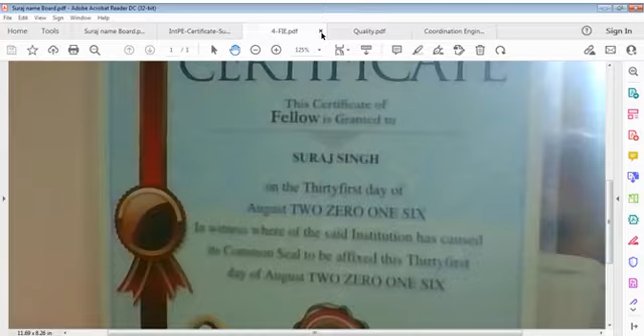And now we have issues regarding the title. I'd like to explain first what the title is. This is quality project works. I'm talking of quality as well as coordination, and quality and coordination work together, because coordination means the procedure to attain quality, and without coordination nothing is going to work.

Nothing works without coordination. Coordination should be in letter and spirit, and the same way quality should be a part of your nature, part of your character, part of your performance, part of your thinking, part of your life, part of everywhere. Without quality we cannot move anywhere. We cannot do without quality. Nothing can move, and that's called work quality, performance quality, defined quality, organized quality.

So it's quality project works, and coordination engineering, which is process or procedures. Whatever work we perform, we should have certain links to each other. We cannot say this activity is independent of others. Yes, there can be independent activities, but they have certain relations with other activities, maybe in parallel or in sequence, in our organization or on schedule or plan, but coordination is a must. Coordination is forgotten by people. There used to be coordination, but now coordination is absent.

Very few people are able to coordinate because coordination means you have to concentrate. Coordination is continuous concentration, not just a one-time thing. Even if you stop somewhere, you have to keep in mind where you stopped, and restart from that point. Whatever system you are in, you have to find that point again and move further. So coordination is a completely continuous process.

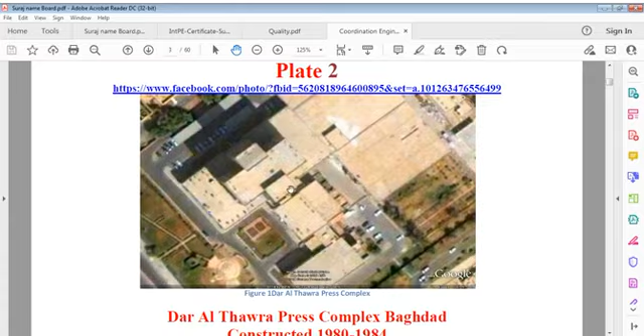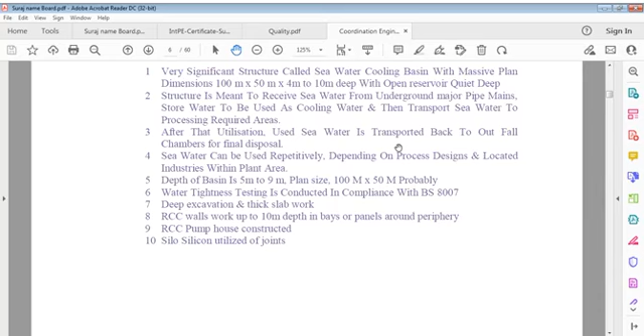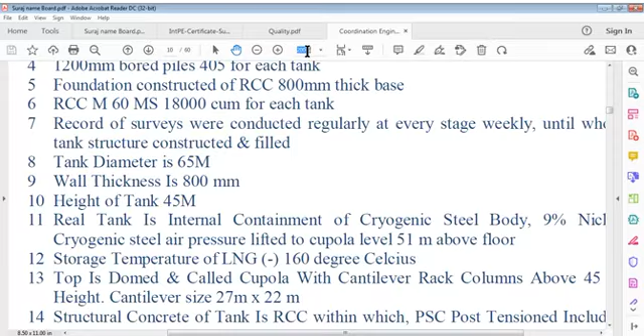So my dear friends, I'm just browsing this file for you, and this plate is referred to LNG plant located at Ras Laffan in Qatar. LNG means liquefied natural gas. Qatar gas project Ras Laffan, Qatar. LNG plant showing 4 number LNG tanks located in Ras Laffan.

Now, these tanks are part of this plant. I'm talking about these 3 tanks and this tank here. These 3 tanks were constructed one time and this one separately. All are same, no difference. Design is same, work is same; it is because of contract. Here, Midmac company, where I worked for 1 year in 1995-96. This company was involved in all civil works of these 4 tanks.

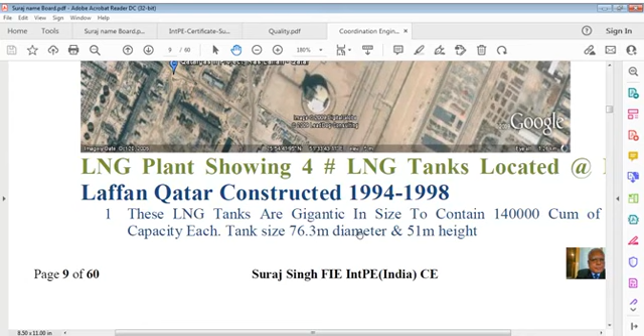These LNG tanks are gigantic in size to contain 140,000 cubic meter capacity each. Tank size is 76.3 meters diameter and 51 meters height. Excavation for each tank is 1200 cubic meters. Soil improvement carried out using graded granular fill, many meters thickness in layers, duly compacted and FDD ensured. 1200mm bored piles, 405 each tank included. Bored piles cast in place or cast in situ.

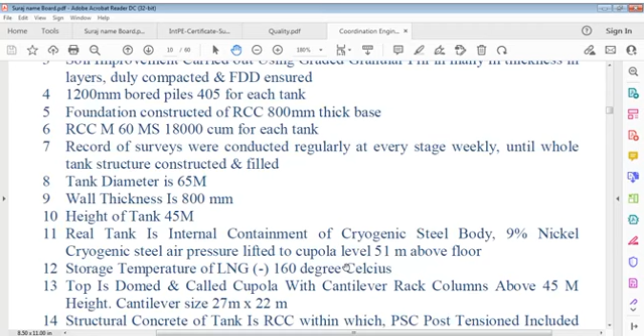Foundation constructed of RCC element, 800 thick base. RCC grade M60 with microsilica included, 18,000 cubic meter for each tank. Record of surveys, we usually call ROS, were conducted regularly at every stage weekly until whole tank structure constructed and filled. Tank diameter is 65 meter. Wall thickness is 800. Height of tank 45 meter or more. Actually it's more than that; I have indicatively written it. It's 50 meter. I correct this one.

Real tank is internal containment of cryogenic steel body, 9% nickel cryogenic steel. Air pressure lifted to cupola level, 51 meter above floor. The storage temperature of LNG is minus 160 degrees Celsius according to information available. It varies. Top is domed, called cupola, with cantilever rack columns.

Above 45 meter height, 50 meter height cantilever size. Cantilever projection on top is 27 meters by 22 meters. It's shown in the sketch, I'll show you that one.

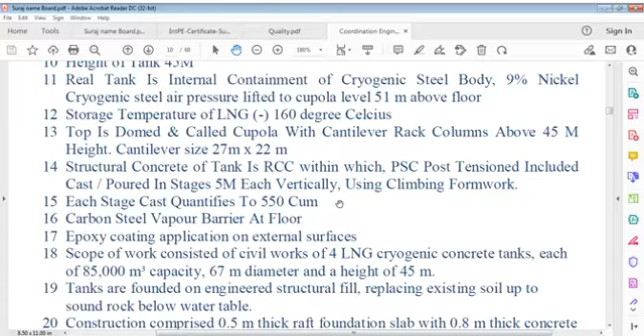A structural concrete tank is RCC, within which PSC post-tensioned concrete is cast in stages of 5 meters each vertically using climbing formwork, quick formwork. Each stage cast quantifies to 550 cubic meters.

Carbon steel vapor barrier at floor, and epoxy coating application on external surfaces.

Scope of work consists of civil works of 4 LNG cryogenic concrete tanks, each of 85,000 cubic capacity, though it is 140,000 - let's say capacity now - with a 67-meter diameter and a height of 45 meters.

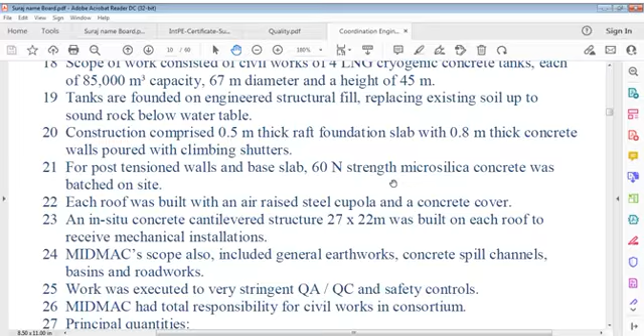Tanks are founded on engineered structural fill, replacing existing soil up to sound rock below the water table. Construction comprised a 0.5 meter thick raft foundation slab with 0.8 meter thick concrete walls poured with climbing shutters.

For post-tensioned walls and base slab, 60 Newton strength microsilica concrete was batched on site. Each roof was built with an air-raised steel cupola and a concrete cover.

An in-situ concrete cantilever structure, 27 by 22 meters, was built on each roof to receive mechanical installations. Midmac's scope also included general earthworks, concrete spill channels, basins, and roadworks.

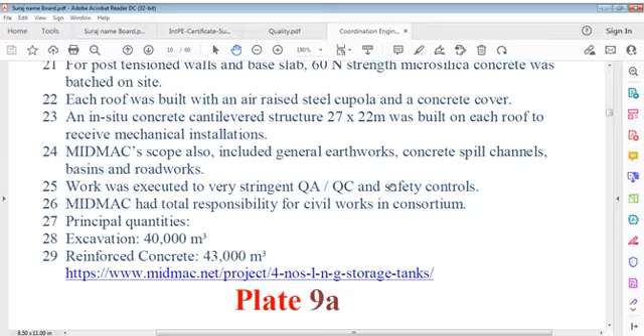Work was executed to very stringent QA, QC, and safety controls. Midmac had total responsibility for civil works in the consortium.

Principal quantities: excavation 40,000 cubic meters for 4 tanks, reinforced concrete 43,000 cubic meters. Here is plate 9 - you can see the tank itself.

You can see the tank here, mechanical handling of it. It's the complete tank - these are the stairs, you can see that. It was the arrangement at that time.

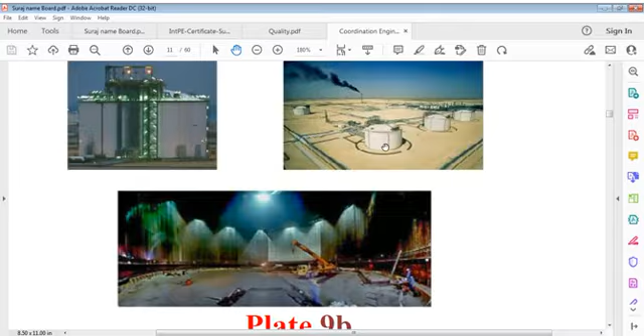You can see this is the finished product, and how it works. Here during construction stage, this one and that one - and this is the finished product. You can see these are tanks 1, 2, 3, 4, and this is the plant.

You may see this internal work being carried out - that's the flooring work.

Cryogenic tank construction - you can see it's inside the tank being done, and the spacious area for this tank.

You may see the concrete surface in various jumps - 1, 2, 3, 4, 5, 6, 7, 8, 9, 10. I guess approximately 5 meters each. So if you see these layers, again 1 through 10, which means about 50 meters here, and then the cupola starts.

And this is the ring beam here, you can see it very well. This is the form for the other one, last time the top slab. And this is, you can say, the other one in the same way - not visible otherwise.

These are all works going on, property works, materials lying here and there. And this is that tank.

We'll come back to this and see what to do about it. I'm now going to state something on the issue of - let me see, what is that - yes, constructability, 3 number tanks. Let's see what is that, and also constructable LNG tanks. Let us first see what it says - constructable 3 number tanks on Midmac. It says something, let's see what's that.

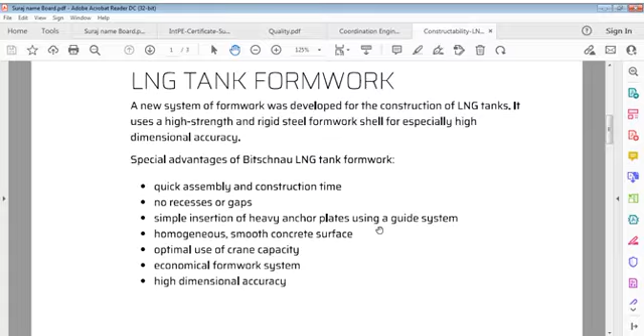Special advantages of Bitschnau LNG tank formwork include quick assembly and construction time, no recesses or gaps, simple insertion of heavy anchor plates using the guide system, homogeneous smooth concrete surface, optimal use of crane capacity, economical formwork system, and high dimensional accuracy.

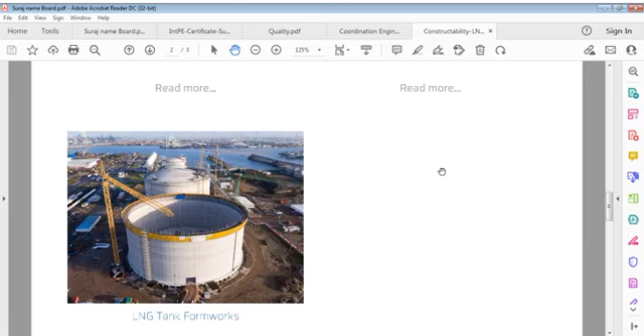I'll open another file, which is also very important in this case. I may be available on the pop-up, if not I don't know. Construction buildability, design build, and general requirement, construction and overall. Let me see this construction buildability, what is that, let us see.

It is a pre-construction exercise that assesses designs from the perspective of those that would manufacture. Actually it says something different. Let me blow this up further so it's clear. Let us understand buildability, and understand all these aspects.

Buildability is a pre-construction exercise that assesses designs from the perspective of those that will manufacture, install components, and carry out construction works. It should not be confused with value engineering, which is used to solve problems and identify and eliminate unwanted costs. though some processes are common to both activities.

In very broad terms, buildability should assess elements of designs in relation to achieving desired final quality, meeting program requirements, de-risking perceived problems, and achieving optimum value for money. This is what the objective is, you could say.

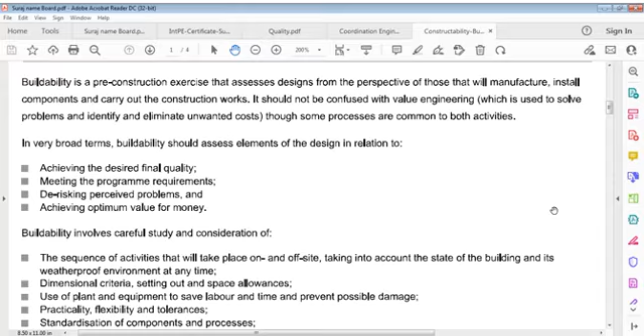Buildability should assess: quality is important, meaning it helps in achieving desired final quality. Well, now I'd say it's not just desired, it's mandated, it should be mandated. So we can say it should achieve desired final quality, meeting program requirements, de-risking perceived problems, and achieving optimum value for money. This is what it is, and what it should be.

So we can say buildability involves careful consideration of four points: one is quality, one is program schedule or program requirement, another is reducing risk on problems, and achieving value for money. So in buildability, advice is given on quality relevance, schedule relevance, risk reduction relevance, and value for money relevance. It depends, you can understand this yourself.

Buildability involves careful study and consideration. Now, careful study of what? The sequence of activities that take place on and off site, taking into account the state of the building and its weatherproof environment, at whatever time.

Dimensional criteria, setting out and space allowances, use of plant and equipment to save labour and time and prevent possible damage, practicality, flexibility, and tolerances, standardization of components and processes, reduction in complexity to shorten the learning curve, and identification of appropriate suppliers.

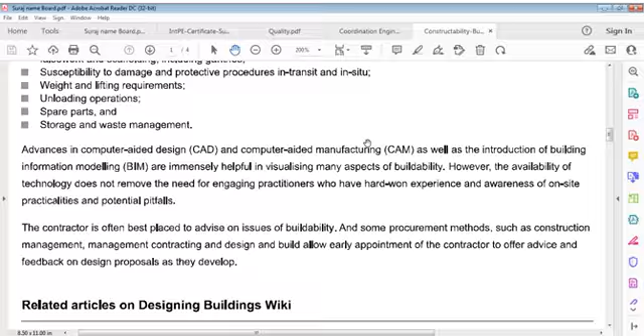Related articles on design may be relevant, though I'm not referring to them, just for information, I'm telling you what's CDM planning period, construction management, customer, all this you can go through. I'll go back now to talk of this point as we discussed, this very important point in the list.

As we talked of, this is a sequence of activities that take place, and that is what we have to understand. Take into account how the dimensional criteria, that's very important. Dimensions should fit in the dimensions on all drawings, so dimensional criteria in all drawings is very important to computerize, but we must be clear that this doesn't impact on works.

Setting out criteria and space allowances we have to consider everywhere, during design as well as during execution, and how to use plant and equipment to save time of workers, speed up the job, accelerate work and prevent possible damages.

So plant and equipment are very important considerations as far as time allowance is concerned. We have to organize time, and time is very important. Time can speed up, or time can be lost if we remain careless. And we have to see the practical viewpoint.

We have to understand flexibility requirements, tolerances, but keep in mind the practical aspect, it should not be bookish all the time. We have to understand this is part of the job, and flexibility which doesn't affect quality or standards, we have to keep all that in consideration.

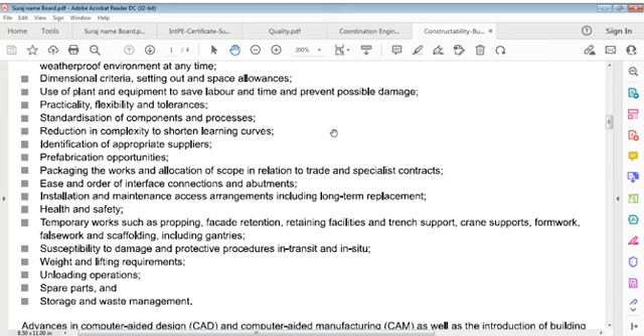Yeah, all these parts are very common, we have to think of these from time and again. And I'll close this file as well.

Science Direct, I think, design for constructability, LNG project management. Let us see what this actually is. This is not my point. Let me go to another file. I'm just trying to search for that. I think I just missed that point. Where is that? I just saw that file. Constructability overview, LNG project.

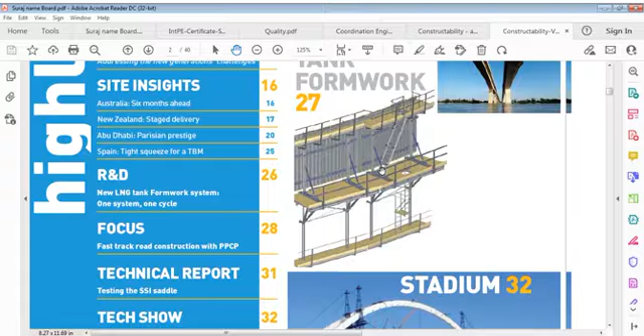You can say tank formwork, this is how you construct this tank, it's a kind of system. You can see supports here, it's a kind of support, and you can see this tank formwork, 27, is a bridge here.

I'm concerned with nuclear, so this is a tank formwork. Let's move further to see. You see there's a curve here, and the stadium here it is. You can see how this works. Stadium just as a part of assessing sustainability. That's the point here: sustainable development.

Initial efforts have been focused on raising awareness of sustainability issues through education, training, and encouraging changes in behavior through green initiatives. Even small individual improvements become major gains. How to measure these efforts? Sustainability covers... Just blow it up, please, faster.

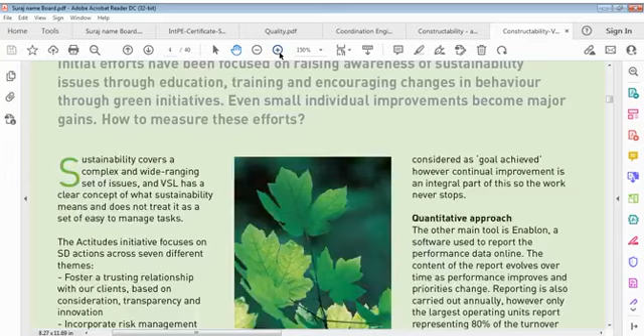VSL has a clear concept of what sustainability means, and do not treat it as a set of easy to manage tasks. The initiative focuses on sustainable development actions across 7 different themes: foster a trusting relationship with our clients based on consideration, transparency, and innovation.

Incorporate risk management into the day-to-day running of the company. Lead our business sector in terms of occupational health and safety. Develop our employees' skills and promote equal opportunity. Establish balanced long-term relationships with our partners, suppliers, subcontractors, and ensure that our business respects the environment in the design of works, and participate in the economic and social life of regions.

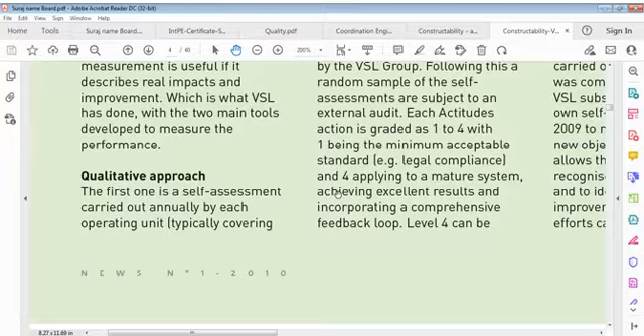However, these are just handled as a qualitative approach. First one is a self-assessment carried out annually by each operating unit, usually by the administration, finance and advocacy department. Each of 42 actions is measured against performance criteria to assess the current situation and set an improvement objective for the coming year. These assessments are then reviewed by regional management.

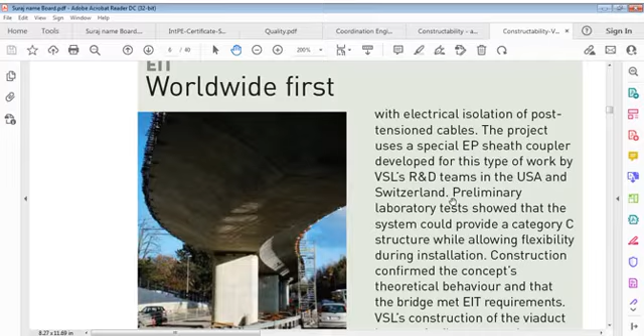Okay, this is a procedure of the company, leave it behind. I'm not interested. I'm just trying to find a quantitative approach. Okay, both are there, quantitative and qualitative. I am trying to find usable information. This is not mine, worldwide first electrical isolation. I think we have to move further. No need of this. Drilling works are going on here, and you may see that

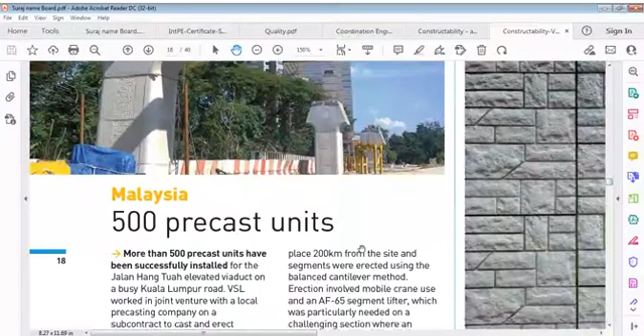this is here, first corrosion resistant addition. VSL was recently awarded its first corrosion protection contract in Hong Kong, and highway approval in Florida. This is their advertisement. I think it's no use for us. I think I'm wasting time, is it? Transport. Well, I think it is only informative work. Something is good here.

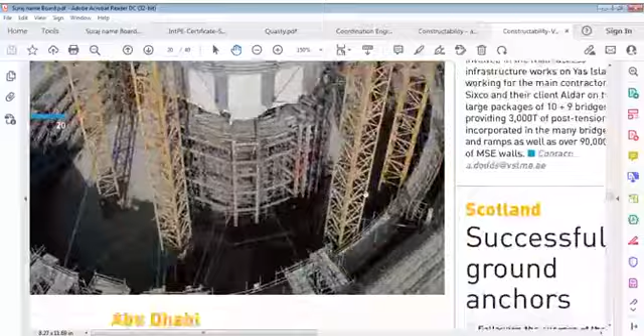Yeah, it is that. I was trying for this. It was important for me. This is one system, one cycle: new LNG tank formwork system. That's what I was looking for. Extensive worldwide involvement in construction of LNG tanks has enabled VSL to analyze data and obtain feedback from site production teams to identify typical and specific problems associated with tank construction, subsequently developing innovative and unique solutions.

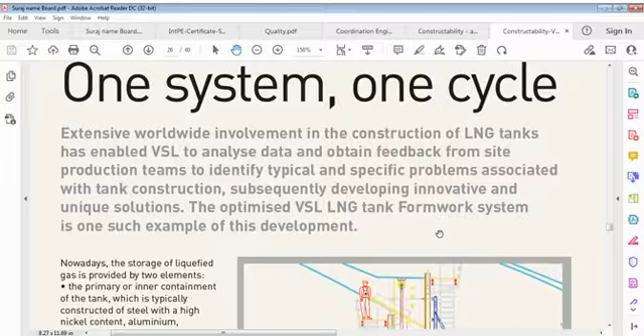The optimized LNG tank formwork system is one such example of this development, and I can now blow this up a little for further clarity. Nowadays, storage of liquefied gas is provided by two elements: the primary or inner containment of the tank, which is typically constructed of steel with a high nickel content, aluminum, stainless steel, or in some cases post-tensioned concrete to meet the extreme demands of cryogenic conditions.

So what is that? The primary or inner containment of the tank is typically constructed of steel with a high nickel content, aluminum, stainless steel, or in some cases post-tensioned concrete to meet extreme demands of cryogenic conditions. The containment must independently be able to withstand the hydrostatic load of liquid. This is the primary one.

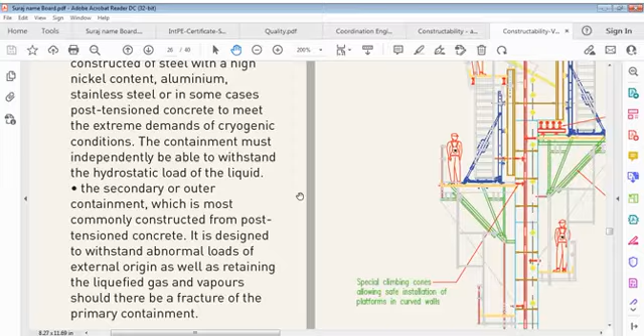Secondary is the outer containment, which is most commonly constructed from post-tensioned concrete, designed to withstand abnormal loads of external origin as well as retaining liquefied gas and vapors should there be a fracture of the primary containment. So this comprehensive modular system for the secondary containment can be used to build entire circular containment structures without the need for time consuming and costly modifications to the climbing form system after installation on site.

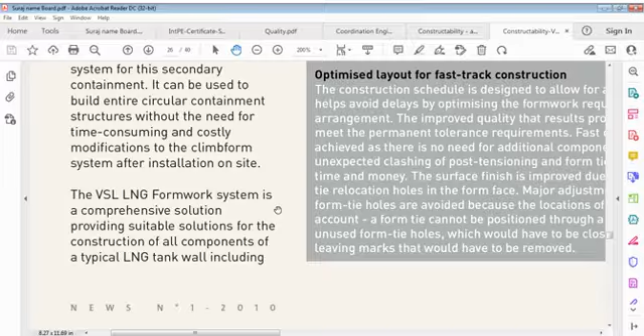The formwork system is a comprehensive solution providing suitable solutions for construction of all components of typical... here. I'll show you what it wants to say first. Optimized layout for fast track construction. Let me see what it's saying. Including tapered walls. Let me finish it first.

What is that after that? Including tapered walls. So it is the next page actually. Including tapered walls with reducing thicknesses, walls of constant thickness and ring beams.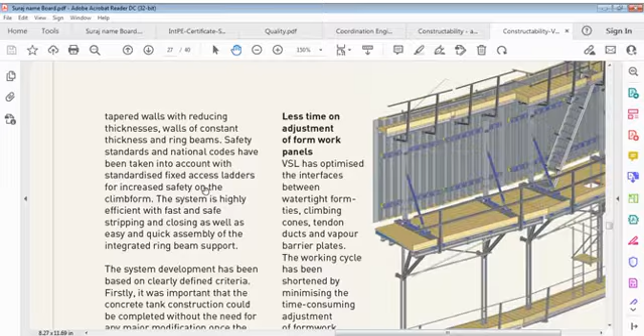Safety standards and national codes have been taken into account, with standardized fixed access ladders for increased safety on the climbing form. The system is highly efficient, with fast and safe stripping and closing, as well as easy and quick assembly of integrated ring beam support. System development has been based on clearly defined criteria.

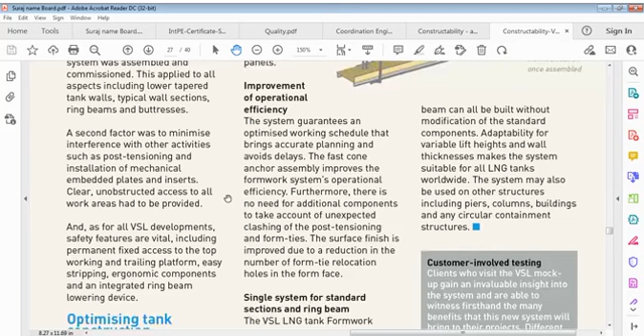Clear unobstructed access to all work areas had to be provided, and for all VSL developments safety features are vital, including permanent fixed access to the top working and trailing platform, easy stripping, ergonomic components, and an integrated ring beam lowering device. Tank construction should be optimized. While designing this new formwork system, VSL has focused on 5 points.

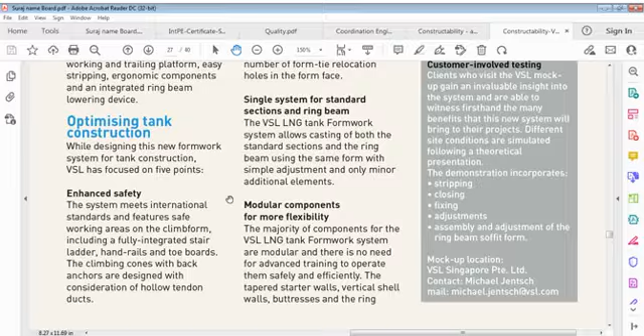Enhanced safety. The system meets international standards and features safe working areas on the climbing form, including a fully integrated stair ladder, handrails and toe boards. Climbing cones with back anchors are designed with consideration of hollow tendon ducts.

What I'm talking about is climbing formwork, that is less time on adjustment of formwork panels, optimizing the interfaces between watertight form ties, climbing cones, tendon ducts and vapor barrier plates. The work cycle has been shortened by minimizing time-consuming adjustment of formwork panels.

So it says less time on adjustments of formwork panels, optimized interfaces between watertight form ties, climbing cones, tendon ducts and vapor barriers. So all that is improvement of operational efficiency. The system guarantees an optimized working schedule that brings accurate planning and avoids delays.

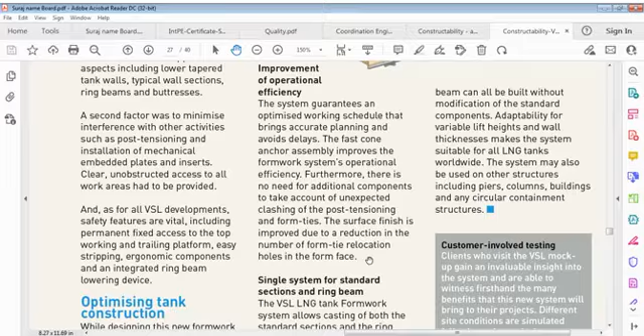Fast cone anchor assembly improves the formwork system's operational efficiency. Furthermore, there is no requirement for additional components to take account of unexpected clashing of post-tensioning and form ties. Surface finishes improve due to the reduction in the number of form tie relocation holes in the form face. Single system for standard section and ring beam.

The LNG tank formwork system allows casting of both standard sections and ring beam using the same form with simple adjustment and only minor additional elements. Modular components for more flexibility. The majority of components for the LNG tank formwork system are modular and there is no requirement for advanced training to operate them safely and efficiently. Tapered starter walls, vertical shell walls, buttresses and ring beam can all be built without modification of standard components.

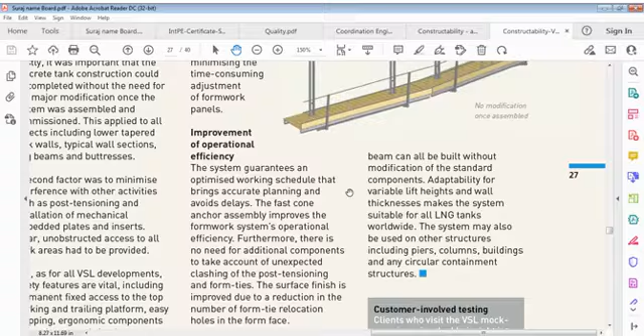Adaptability for variable lift heights and wall thicknesses makes the system suitable for all LNG tanks worldwide. The system may also be used on other structures, including piers, columns, buildings, and any circular containment structures. And then we have customer involved testing.

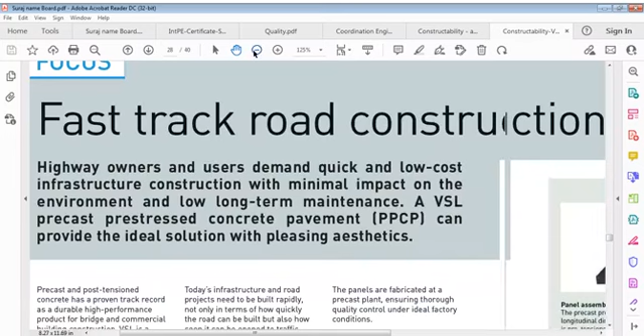Fast track road construction, highway etc. I'm not going to talk of this though. What is this? It says fast track road construction with PPCP, and highway owners and users demand quick and low cost infrastructure construction with minimal impact on the environment and low long-term maintenance. Precast pre-stressed concrete pavement can provide an ideal solution with pleasing aesthetics. So this is a different subject, we'll discuss it later on.

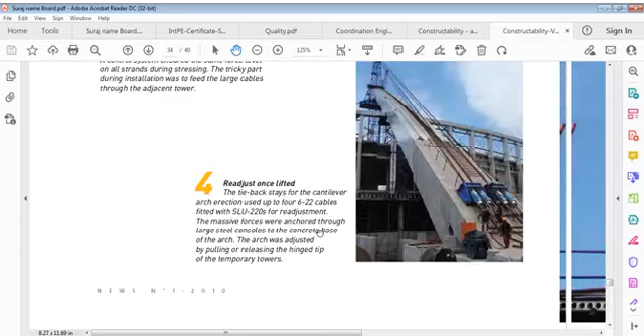Now let us see what else is there. LNG tank I have covered. This is tied down, so we'll look at that separately. And this is our section. Stadium, I think this is, and stadium support. Later on we'll look into that. I'll put this back on, and let's see what's constructibility here.

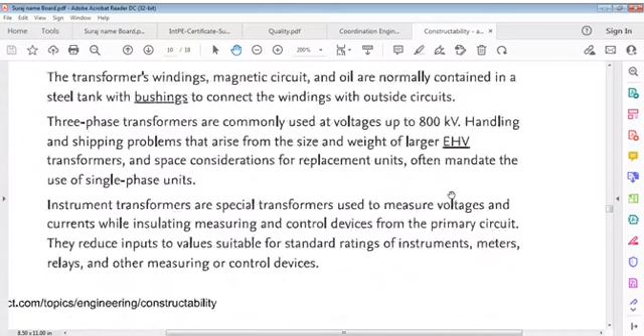We are talking ultimately of constructability and coordination. So it is 18 pages, but let us see what it says. Because I don't want to confuse, high voltage and all that we will take later on also. It's not my subject today. So let's close this and we'll see coordination, and we talk of that one now. Let me close this also, and let us see how we move on to this point. Constructability, building.

Constructability. What is constructability? Vessels on overview we have seen, LNG tanks and all that. Okay. Now we have to stick to the point and come back to our position. Let's see where it is now. We have here

I was just referring to some formwork issue. Here we have to see what we have talked of. Now, as we said in writing about this, this is, you can say, the early construction stage and how work is going on. You can see, and this is the internal area that we did. It was well lit and ventilated. Forced ventilation was allowed because you can see all sides are closed.

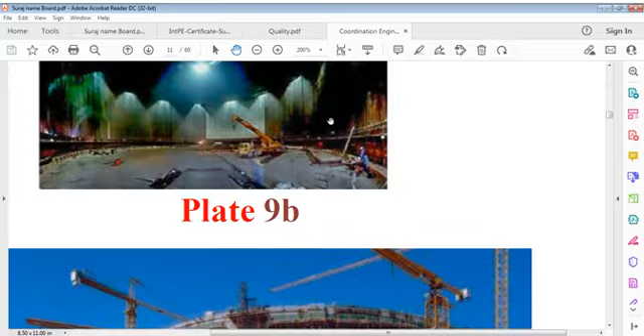It's a circular tank, closed from the roof, and of course there was one access panel, a temporary one, through which you could enter. There was forced ventilation all the time, so it worked. And it's quite big in scope, and you can see how it works, so this was working here, and this is all the following work going on, which is cryogenic steel plate. As we said in activities here, we can explain again what it says.

Maybe some data confusion problem. Let's say it says LNG tank of this size. You can imagine. Of course, many of you might have seen this tank, but even then we had to discuss this tank in its letter and spirit so that we can understand what to talk about. It's an important quality issue, and I'm saying gigantic size, but it's quite good.

The volume is 140,000 cubic meters, which is a good one, and this is 76 meter diameter, or around 75 or 80 meters diameter, and height is say 50 meters. So excavation depends on foundation depth and all that. So in each tank 1200 cubic meters. It's not very big, if you see it like mass excavation, but the problem was that it was a rock area.

Doha, Qatar is generally a rock area. It's not sand or clay. It's different, and excavation takes a lot of time there. In Qatar, excavations are done by rock breakers, or an excavator where the excavation bucket is replaced by a hammer, usually called a rock breaker, or you can call it a hammer. Sometimes we call it in place of jackhammer.

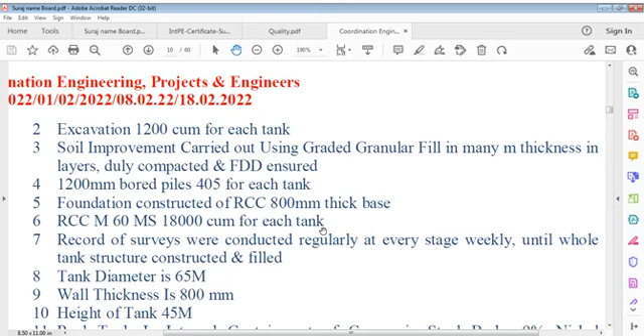These are very common these days for crack formation prevention, for corrosion, or for resisting rapid chloride penetration into concrete. These requirements and the availability of SCMs, supplementary cementing materials, have practically declared sulfate resisting concrete obsolete, and OPC also 90 or 30% obsolete, because we don't use OPC nowadays to that limit.

Now the tank diameter is 65. I'm not interested in diameters, I'm showing it just for reference. Wall thickness is 800 mm. Level surveys were conducted regularly at every stage, frequently during the week, until the whole structure construction was finished. What's the purpose of that? We have to understand the purpose of the level records.

See this heavy structure, 800 mm thick walls and 75 to 80 meters in diameter, and of course there's a raft below. The pile is not an issue because the pile is already within the soil. There's every chance it's mass concrete; you can say the whole tank is a massive block, and there's no question of a construction joint in it. So it's one unit. There is always a concern of cracking and thermal effects, so a specified, special technique must be used for this.

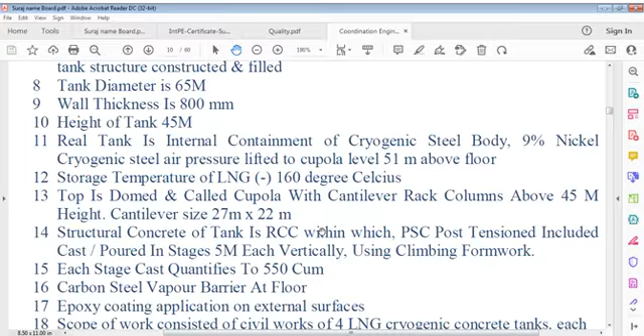Platform is also quite big. Structural concrete, and we have to see our post-tensioning effect of tendons, cables. Each stage quantities they are, and carbon steel vapor barrier at floor and epoxy coating externally. Therefore, we can say scope of work consists of civil works of 4 LNG cryogenic concrete tanks, each 85,000 cubic meter capacity. Tanks are founded on engineered structural fill, replacing existing soil.

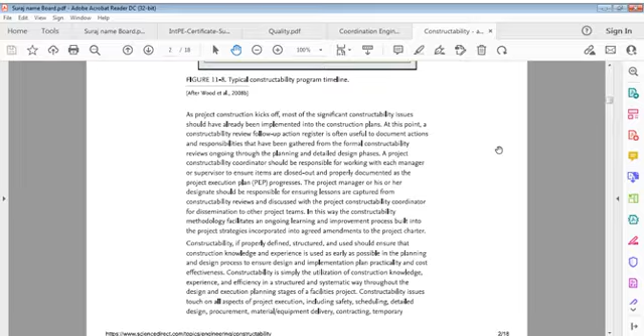I'm trying to find a file. There's so many files. I forgot the name of that. Let me see. Which file is this? No, it's not that. They are mistaken. I missed that one somewhere. No, this is BIM related. Leave it here. This is some BIM. I'm interested in BIM. I'm interested in so many files.

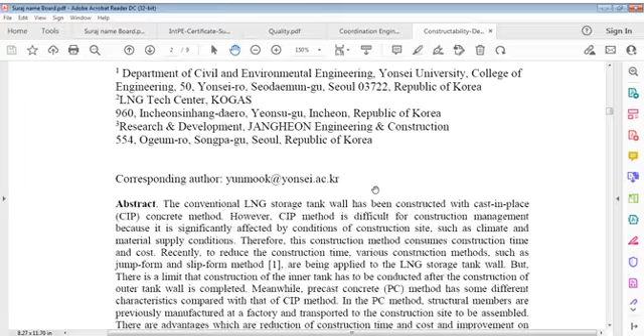So what it says, development of construction technique of LNG storage tank wall using precast concrete panels. We referred to it yesterday. Again, I'm showing it to you because this is by KOGAS, and so many others. You can see all these. Department of Civil Engineering, Civil and Environmental Engineering, College of Engineering. This is somewhere in Korea. And what's the abstract? I'll read again.

Constructed with cast-in-place CIP concrete method. However, this method is difficult for construction because it is significantly affected by conditions of the construction site, such as climate and material supply conditions. This construction method consumes construction time and cost. Recently, to reduce construction time and costs, various construction methods, such as jump form and slip form method, are being applied to LNG storage tank walls. This limits the construction: construction of inner tank has to be conducted after construction of outer tank wall is over.

Meanwhile, precast concrete method has some different characteristics compared with the CIP method. In PC method, structural members are previously manufactured at a factory and transported to construction site to be assembled. There are advantages, which are reduction of construction time and cost, and improvement in quality control and durability. Main objectives of this paper are to introduce a new construction technique for LNG storage tank wall using precast panels, to overcome existing limitations and discuss benefits of technology. In addition, to verify applicability of

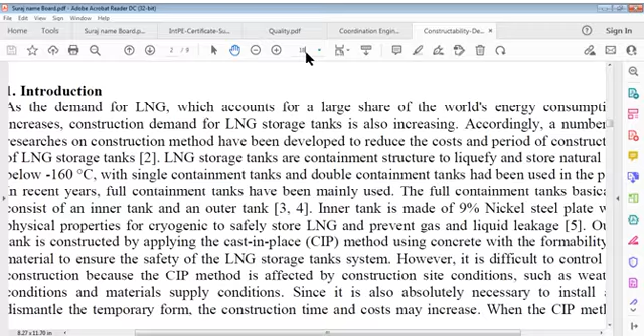Now 190, I'll make it 190 so that we can clearly see. Still it's not coming in there. Let's put up 180, and let us see it comes full.

Now the introduction is, as demand for LNG, which accounts for a large share of world's energy consumption, increases, construction demand for LNG storage tanks also increases. Accordingly, a number of research efforts on construction methods have been developed to reduce cost and period of construction of LNG storage tanks. LNG storage tanks are containment structures, as we have discussed already and seen in practice on site. LNG storage tanks are containment structures to liquefy and store natural gas below minus 160 degrees Celsius.

It's not necessary, but let us say up to minus 160 degrees Celsius, with single containment tanks and double containment tanks. Single containment tanks and double containment tanks had been used in the past. In recent years, full containment tanks have been mainly used. Full containment tanks basically consist of inner tank and outer tank.

Full containment tanks basically consist of an inner tank and an outer tank. The inner tank is made of 9% nickel steel plate with physical properties for cryogenic conditions, to safely store LNG and prevent gas and liquid leakage. The outer tank is constructed by applying the cast-in-place method using concrete with formability of material to ensure safety of the LNG storage tank system.

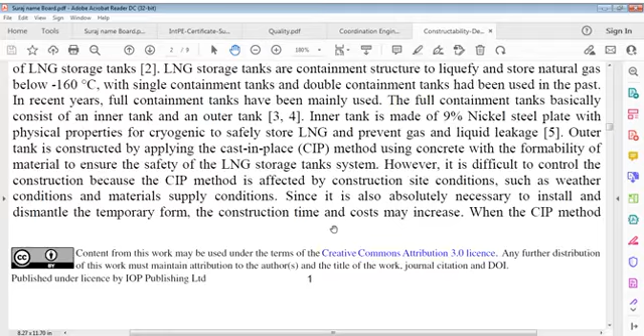The outer tank is constructed by applying the cast-in-place method using concrete with formability of material to ensure safety of LNG storage tank systems. However, it's difficult to control construction because the CIP (cast-in-place) method is affected by construction site conditions such as weather and material supply. Since it's absolutely necessary to install and dismantle temporary forms, construction time and cost may increase when applied to LNG storage tanks.

An inner tank must be constructed after construction of the outer tank and roof completes. Therefore, in this paper, a new construction method to rapidly construct LNG storage tanks is proposed, applying a precast method that satisfies economy and construction speed simultaneously for the outer tank, considering problems and improvements of existing LNG storage tanks. This method has the advantage of replacing the temporary form used in existing LNG storage tanks with PC panels, reducing time to dismantle the form and allowing simultaneous construction of the inner and outer tanks.

In order to verify the construction method proposed in this paper, a part of a real-scale LNG storage tank was installed for a mock-up test, and strain sensors were used to monitor the behavior of the mock-up during construction in real time. Constructability and structural safety evaluations were discussed.

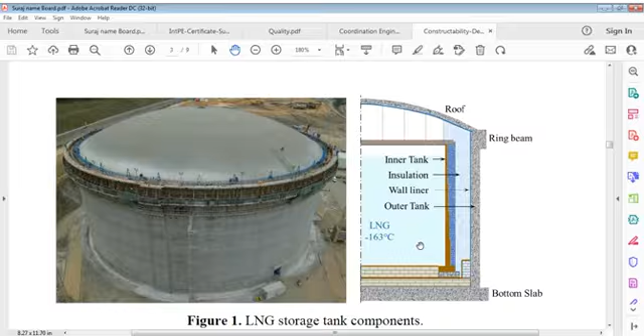You can see the inner tank, I think a saffron color here or something like that. This is here the insulation, to maintain temperature, and the wall liners. This is the RCC tank wall liner, external tank liner, the outer tank it is, and in this volume, LNG at minus 163 degrees Celsius is shown. Here is insulation material, and that's what this tank shows.

Now this figure shows LNG storage tank components. Now we have to go up and see what it means, what it states — it states the application of precast concrete panels, which is what we are going to discuss.

That's an important point either way, we have to understand what it says. In this chapter, construction cases of precast panels are discussed. The construction method proposed in this paper is compared with the existing construction method of LNG storage tanks.

Construction cases: as the structure of buildings becomes high rise, like this one at 50 meters, enlargement and diversification of such structures is occurring throughout the world.

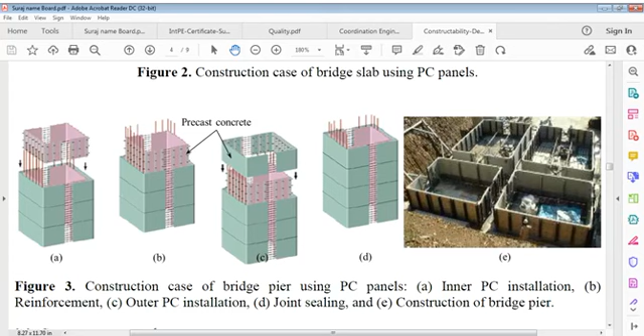The existing construction method of LNG storage tanks has a process of constructing the outer tank after construction of the foundation and bottom slab. After that construction, you can start the LNG storage tank.

The outer tank is constructed by applying a climbing form using temporary form on site. During construction of the outer tank, the roof of the tank is built at the same time.

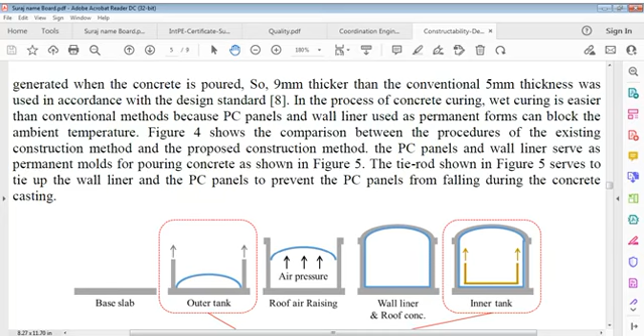We have a figure here which shows the difference between the two construction methods. PC panels and wall liners serve as permanent molds for pouring concrete. The tie rods shown in the figure tie up the wall liner and PC panels to prevent the PC panels from falling during concrete casting.

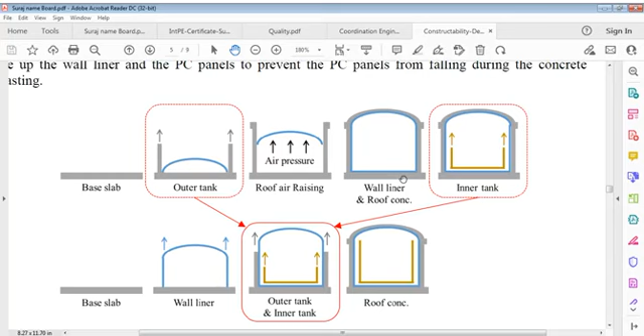This is a comparison of the conventional and suggested methods, A and B. Let's start with the base slab, then there's the outer tank. You can see the outer tank, and if you look at the complete tank here, this is the outer tank.

This is your liner. Here is the starting of the cupola, and of course pressure is there. This goes up and reaches here. Here is liner only, not tank, and here is the tank here.

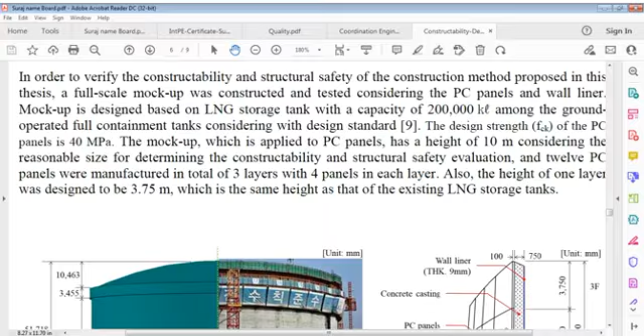Considering the design strength, the PC panel is 40 MPa. The mock-up applied to the PC panels has a height of 10 meters, considering a reasonable size for determining constructability and structural safety evaluation. 12 PC panels were manufactured in total, with 3 layers of 4 panels each layer. Also, the height of one layer was designed to be 3.75 meters, the same height as that of the existing LNG storage tank.

I feel cold now. The beginning temperature was 14 degrees. It's come down by 1 degree till now, but here is 11 degrees dew point, so it is 13, 14, and 11 degrees.

We're talking about this tank here. This is the tank. Here is the mock-up size: 12 panels, height is 10 meters, tank total height is 51.718, cupola free height is 10.463, and ring beam is 3.455. Real height of the tank is 37.8 meters.

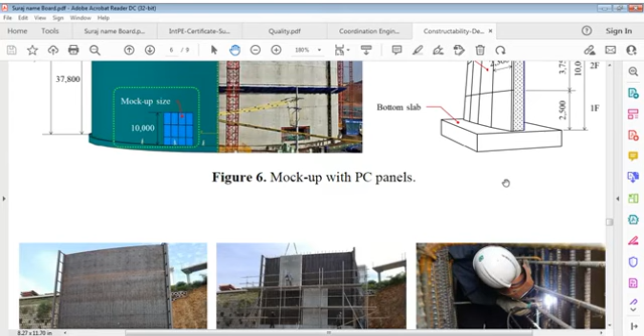These are other projects. Now, construction procedure mock-up with PC panels. Figure 7, construction procedure mock-up with PC panels, as A, B, C, D, E, F. A is erection of wall liner. B is assembling PC panels. C is tie rod installation. D is concrete casting. E is concrete curing. And F is completed mock-up.

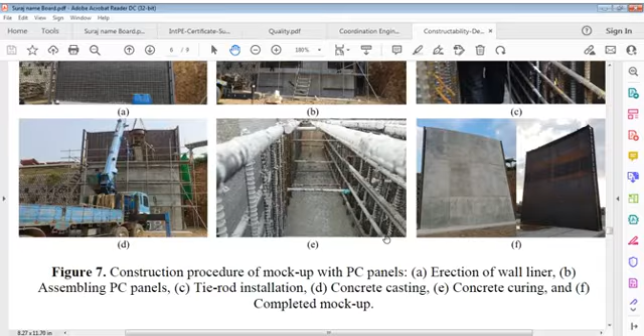You can see once again, A is erection of wall liner, then concrete panel fixing, or you can say assembling. Tie rod here, and here is concrete casting, and this is concrete curing. Top view from this. That's concrete curing and complete mock-up.

Experiments for verification of constructability. To verify constructability and structural safety of the proposed construction method through mock-up test, strain sensors were attached to the second and third layers of wall liner, which are most concerned during construction. Strain data of wall liner was collected while monitoring of strain sensors.

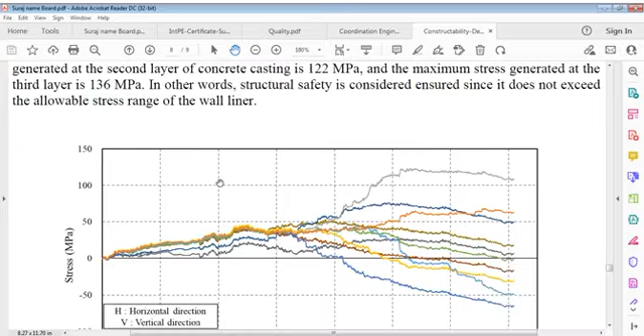Now what are the results? Let us see. Measurement experiment shown in figure 10. Stress distribution of wall liner, second layer, third layer. If you see, the horizontal x-axis is time, 1 to 7 hours. Vertical is stress in MPa, minus 100 downwards and then 0, 50, 100 MPa. As time increases, stress increases. Stress MPa and time again.

Conclusion. This paper introduces a new construction method for LNG tanks using PC panels, and discusses advantages of this technology to overcome limitations of existing construction methods. This new construction method using PC panels has the advantage that independent wall liner and PC panels can be used permanently for construction of the outer tank, allowing both inner and outer tanks to be constructed at the same time. In addition, mock-ups were manufactured to evaluate structural safety in construction steps. Experimental measurements were implemented.

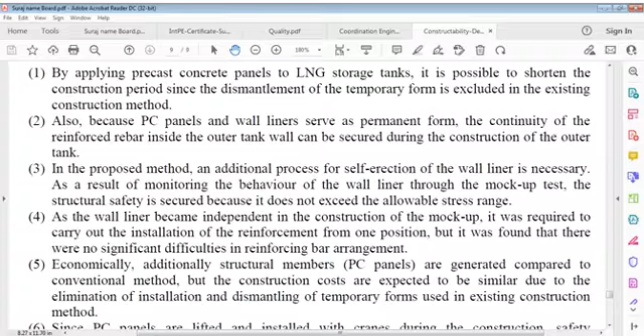It says wall liners became independent in the construction mock-up. It was required to carry out installation of reinforcement from one position, but no significant difficulties were found. Economically, additional structural members are generated compared to the conventional method, but construction costs are expected to be similar due to elimination of installation and dismantling of temporary forms used in the existing construction method.

Since PC panels are lifted and installed with cranes during construction, safety countermeasures must be taken to prevent falling of PC panels.

In conclusion, the construction method of LNG tanks using PC panels can significantly reduce the construction period and can be widely applied to various storage tanks regardless of the capacity of storage tanks. However, it is desirable to carefully examine each construction step and apply it to actual construction of LNG storage tanks. This paper was supported by Education Research Integration through...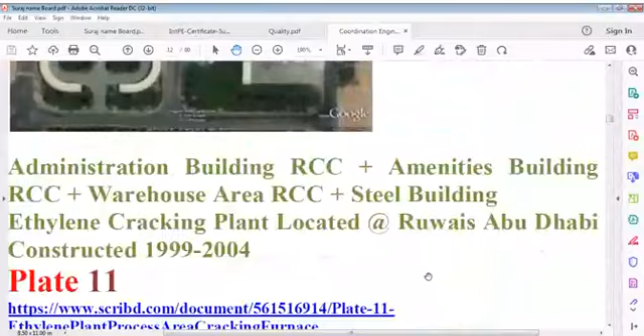I'll go to another plate. Yes. Typical means not exactly the same, but just indicatively I am showing. Indicatively, as I said, this is our hospital, and landscape-wise it looks like that. And see that one.

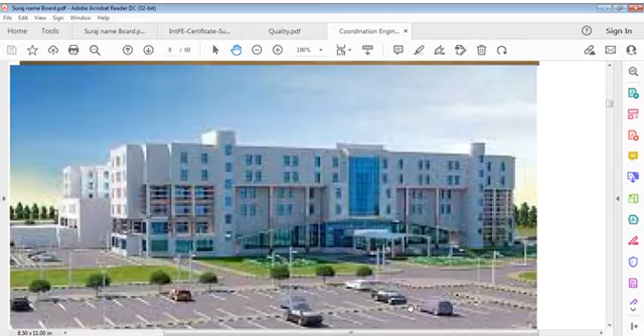Just some of my projects. There are so many other projects which I cannot extract. We could not extract them from there because of various reasons. But here is what I'm trying to get you in. Whatever is possible, whatever is not possible, all that. From every viewpoint, we have to think of how best we can extract, if it is at all possible; otherwise it's not possible at all, you can say.

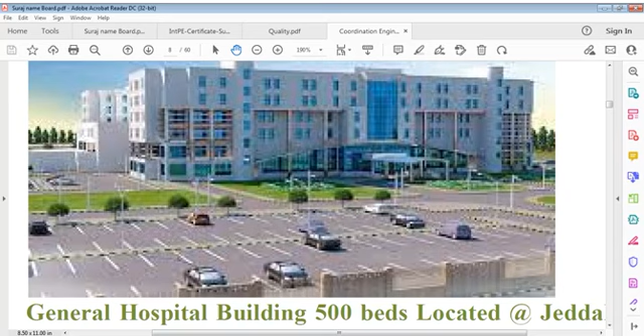Unfortunately, this was never controlled by professionals. It's a multinational project, with various engineers from various countries. I was only an engineer here for a short while, about 6 months, but Egyptian engineers and many more engineers from the Philippines and many other countries collaborated together, and the fate of this project, as far as construction was concerned, has gone into the ashtray. No controls of quality, no controls of progress. A complete hodgepodge. There was a Pakistani consultant and many Indians there, and this was owned by a Ministry of KSA. I did not see such lack of control anywhere else.

It is included there. It's just an example. As you see, 2010, not very becoming, many shortcomings in progress and quality, etc. I can say they don't work well. I don't want to criticize someone, but I'm just giving my experience to you, which is of course very important from every viewpoint. We should be frank and true to work, and that's a very important one.

As far as coordination engineering is concerned, coordination engineering is friend of none. It has to be done, in fact. Without doing this, nothing can move. Therefore I say coordination engineering, and in fact missing coordination means missing good engineering. This we have to understand. If you don't coordinate, you cannot do good engineering. It's not only in civil, it applies to every branch of engineering, and in fact to every branch of work, whatever we do.